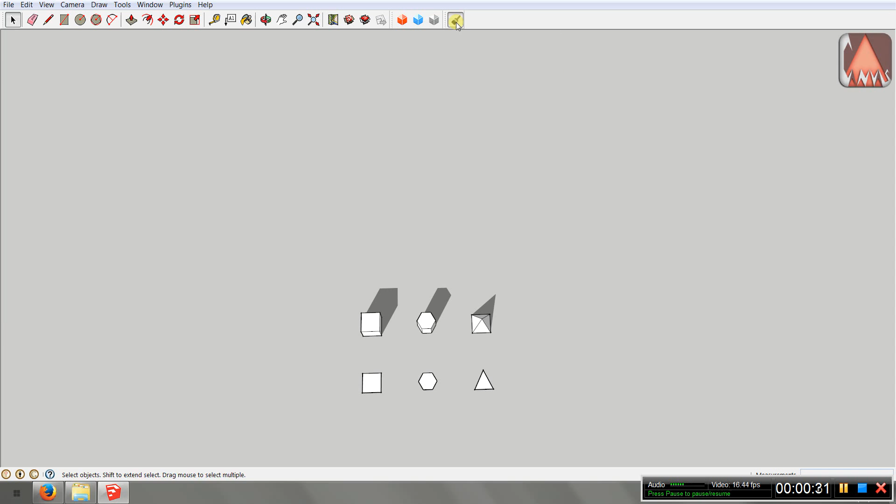When you first install the plugin, you will notice that at the toolbar there's a new button that has a brush as a logo. And if you hover over that, it will give you the title, which is Canvas, and a short description. If we click that button, a web dialog is going to be shown, and here's where you're going to change the parameters that will affect the copy that you're going to place.

So one thing to notice is that if you first activate the tool and you don't have any group or component selected, and you try to click anywhere on your viewport, you will be prompted a warning that says that before the tool can be used, you have to select a group or a component. Okay, so we want to do that before activating the tool. So we click this cube, which is a group. It's important to notice that loose geometry will not work. It has to be a group or a component.

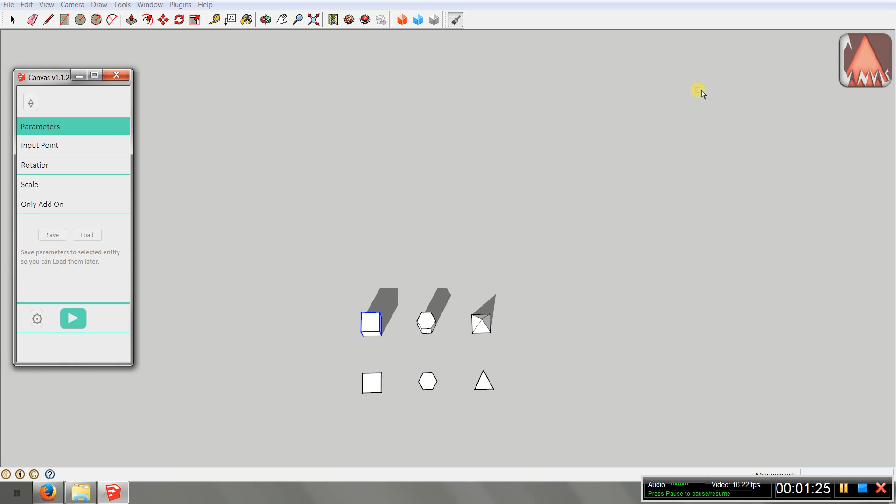Now to activate the tool again, we can do as we mentioned before, clicking that toolbar button, or we can go to the web dialog and click this button near the bottom, and that will activate the tool. Now when we click anywhere on the viewport, a new copy of that selected group is being added. And as default, this is what you will get. But if you want to change the output of the copy that you want to place, you will have to change the parameters. And this is where we're going to explain what each of these parameters can change.

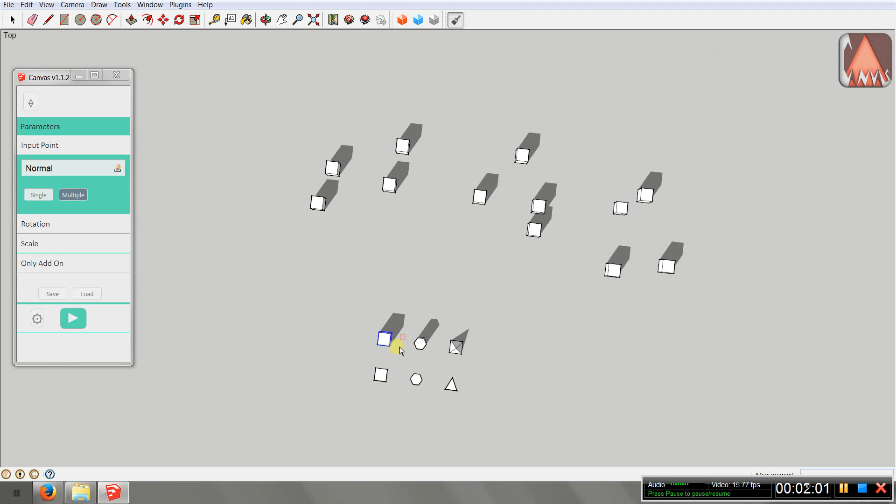The first one is input point. And right now, you're placing a single object per click. If you want to change that to adding multiple objects if you click and hold your left mouse button, you have to change this from single to multiple. And now, if I click and hold the button and move the cursor around, multiple objects are going to be placed. And this is very cool if you want to quickly populate your scene with objects.

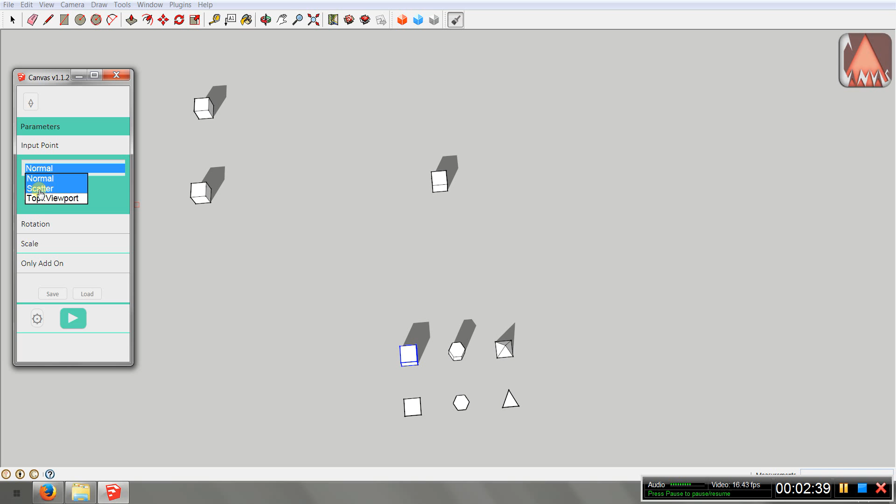Alright, so now we can talk, let me delete this very quickly, about this drop-down menu. The default option is normal, and what this means is that you will place an object where the cursor position is. Okay, so wherever I move the cursor, that's where the object is going to be placed. But let's say I'm going to change that to scatter. What will happen is if I click and hold the button and move, you'll notice that there's a random position generated around the cursor, and this will become more evident if I zoom out.

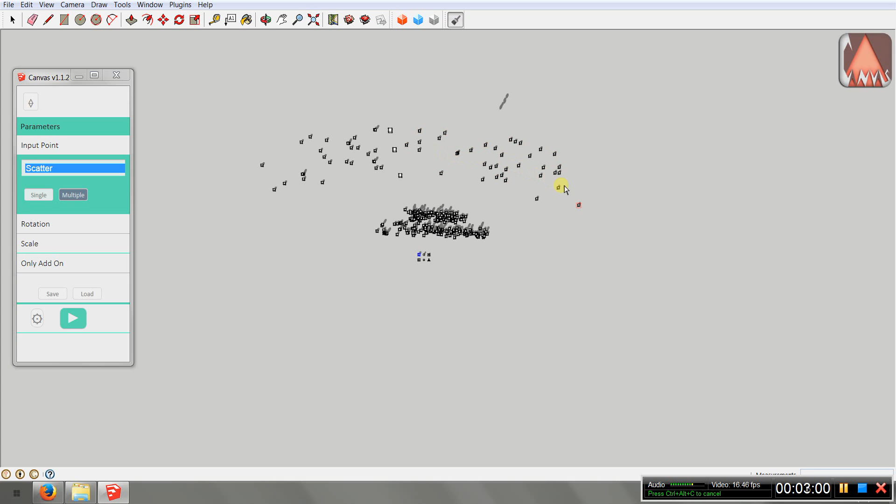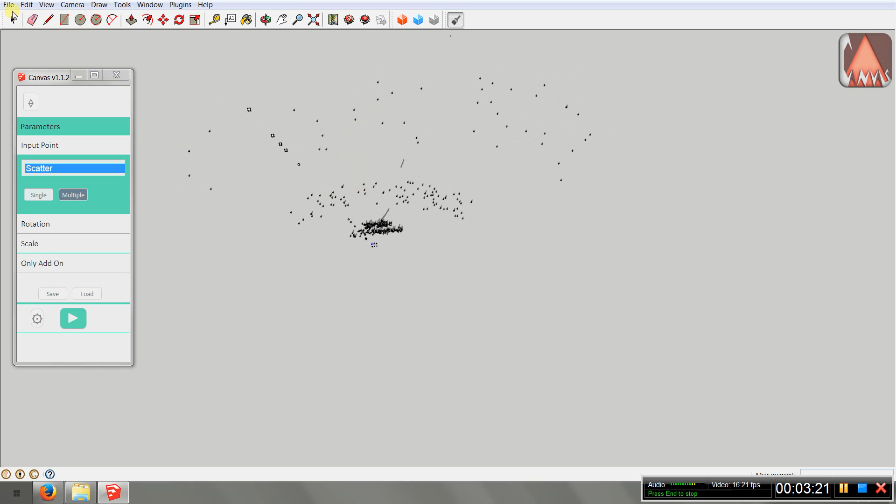The farther away I get and I apply the objects, the further away the objects are going to be laid down. Okay, if I zoom in very quickly, you will notice that the objects that are being laid down are very close to each other. But if I go very far away, let's go even farther away, you'll see they are very far apart. And this is something that you will want to experiment with by yourself, see what works best for you, depending on what you want to do. Let me delete what I just copied so I can keep going.

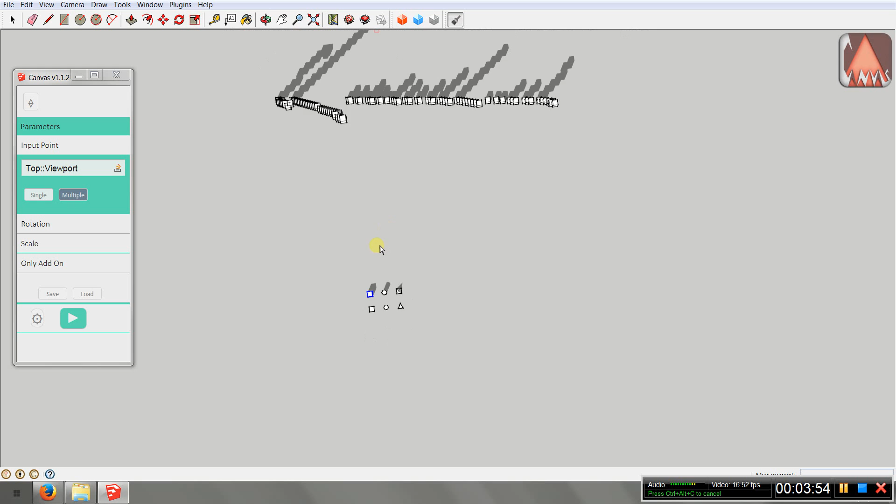Alright. So the next option in the drop-down menu is top viewport. And this is nice if you want to add objects on a straight line. It will not take the cursor position. It will not place the objects around the cursor, but instead it will place the object on top of the viewport. If you see on top over here, there is where the objects are going to be placed. And you can rotate it and use that as reference to place straight lines. Okay? And that is what it is best used for.

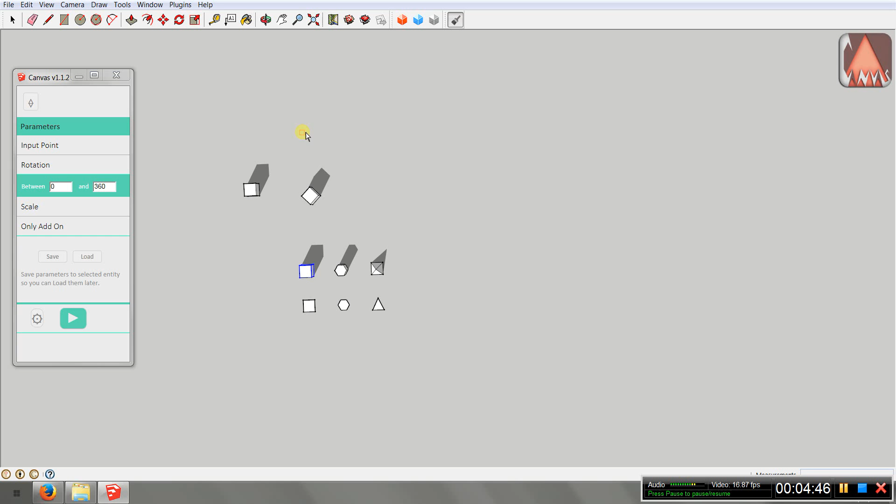Alright, so now that we've explained the input point parameters, let's go to the next one, which is rotation. Before we do that, let's go to the default, and we go to rotation. Right now it's set to 0, so that means when we place an object, it will not affect the rotation. But if we change that to say 45, that new object is going to be placed 45 degrees from the original one. Now an interesting thing is that you can have a range. Let's say we want to rotate from 0 degrees to 360 degrees. And that will randomly generate a rotation from those parameters.

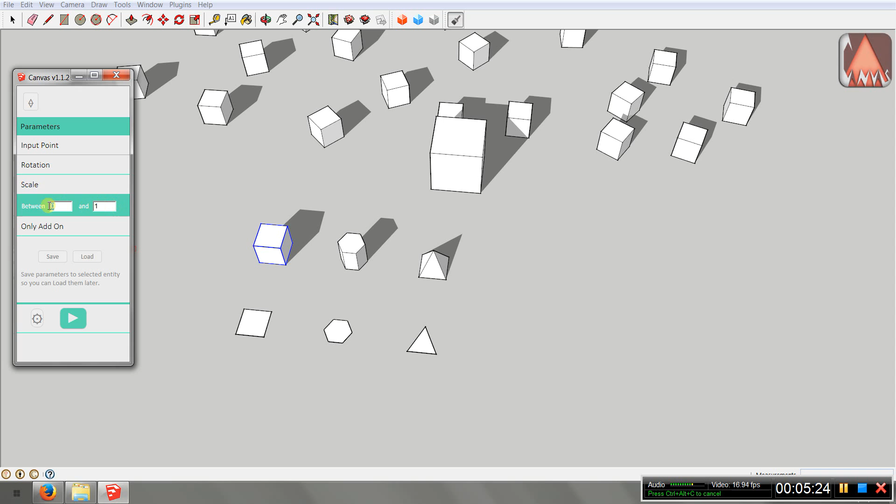Now let's move on to scale, and this is going to place a scale factor of 1. This is the default, so that means that the object that's going to be placed is not going to be scaled. If we want to scale that object by 2 and we place that object, you notice that it's twice as big, and so on. We can set this to whatever number we want. And as we mentioned with rotation, we can place ranges. So if we want to scale from 1 to, let's say, 8, it will randomly choose a factor to scale that object between 1 and 8. Okay, so you get nice variety. Okay, so now let's delete this and move to the next parameters.

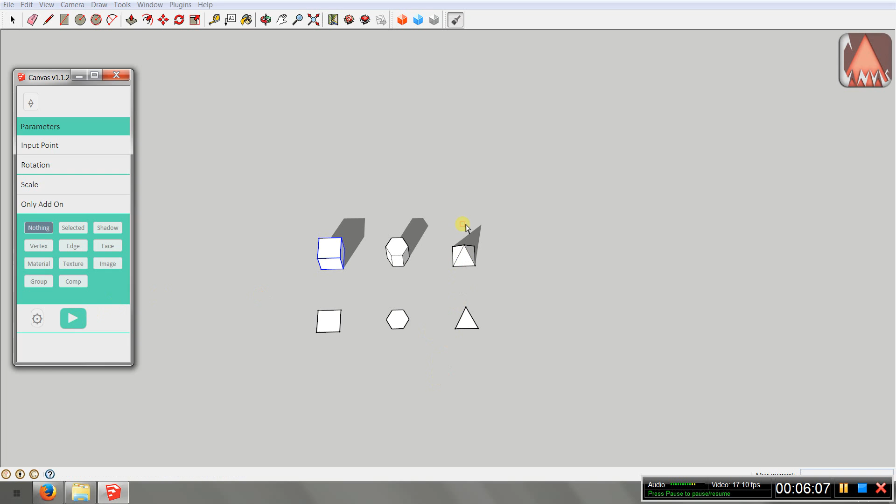The next one is only add-on, and these are basically filters that will add a copy depending on whether those filter parameters are met. The first one is nothing, and this means that the copy you add will only apply if there's an empty space. Right now it's adding an object, but as soon as I try to add a copy on top of a geometry, you will see nothing happens. Only when I move to an empty space is where that object is going to be placed.

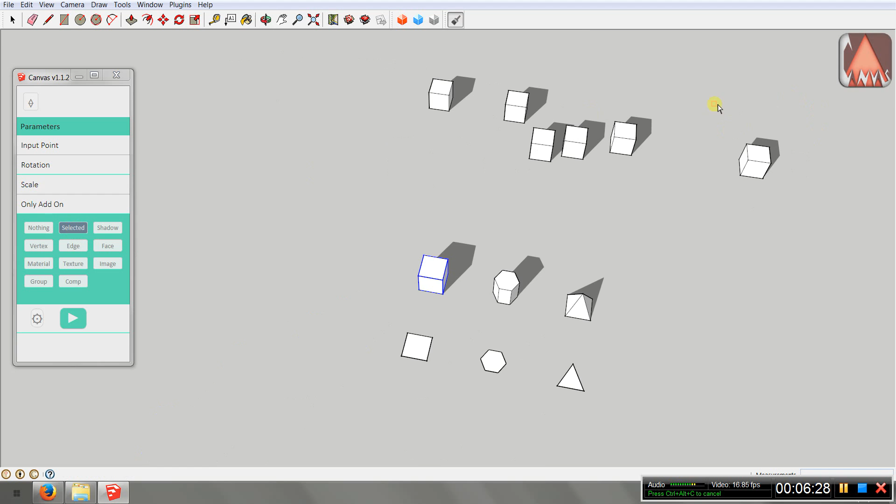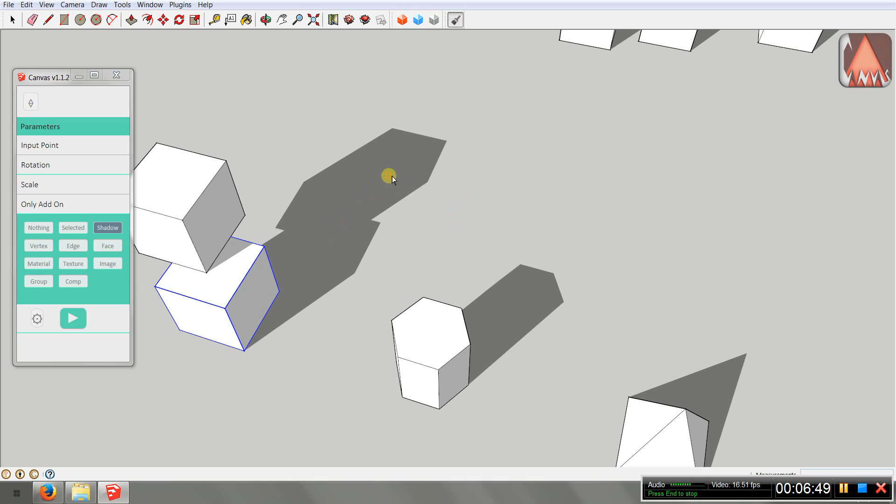The next one is selected, and this means that it will only add a copy wherever there is an active selection. So over here there's an active selection, and I click over here, you see that copy is added. If I try anywhere else, it won't work. And this next one is called shadow, and it will only add the selected copy where there's shadow. So over here there's a shadow, it will select that object. Nowhere else it will work.

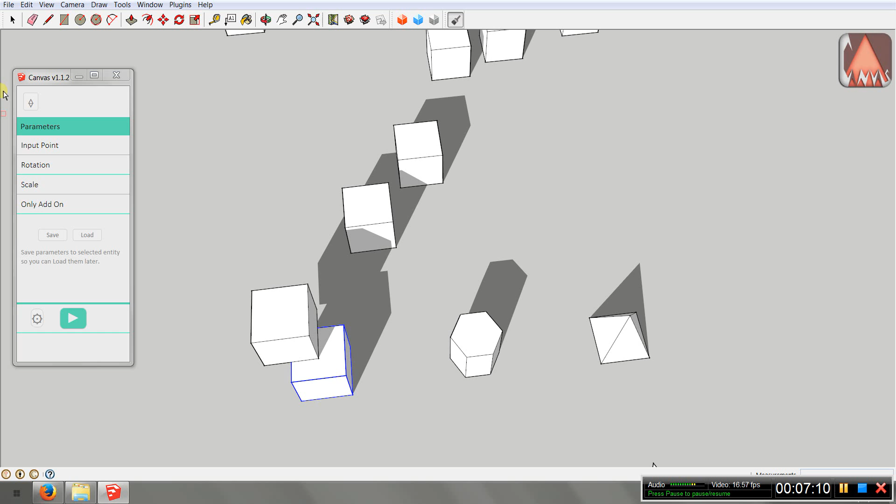And this applies to every filter over here, so I want you to experiment with what each of these does, so that you become familiar with them. So these are the last parameters that you can set. There are other features that I want to explain, and let me delete this so I don't confuse you. This is very cool. You can save the parameters that you set over here to a specific object. Let me demonstrate.

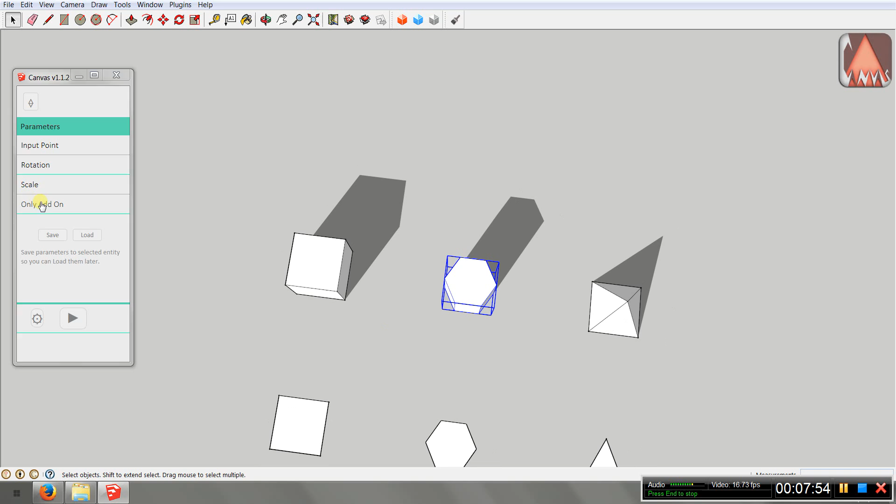If I want to save the current parameters to this object, I select that object and click Save. Now if I select another object and change the parameters, let's say I want the input point to be scatter and multiple, a rotation between 0 and 360, a scale between 1 and 8, and a filter to only apply on nothing, and if I click Save, those parameters are saved on that object.

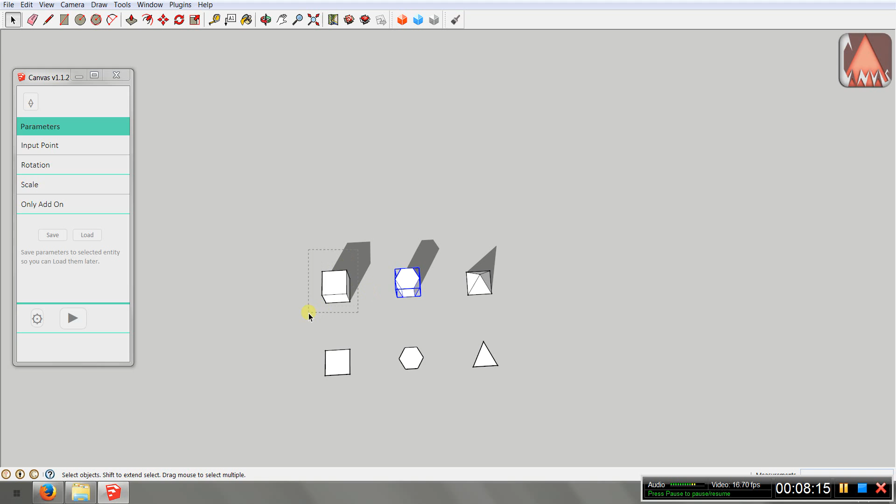Let me demonstrate. If I activate the tool and apply that object, you see those parameters are still active. If I want to change to the parameters set to the first object, the cube, I deactivate the tool first, select that cube, click Load, and then activate the tool again. Once I add the objects again, it will add according to the parameters stored on that object. I hope this was clear. This can improve the speed at which you work with the tool. Alright, so that's it for the parameters.

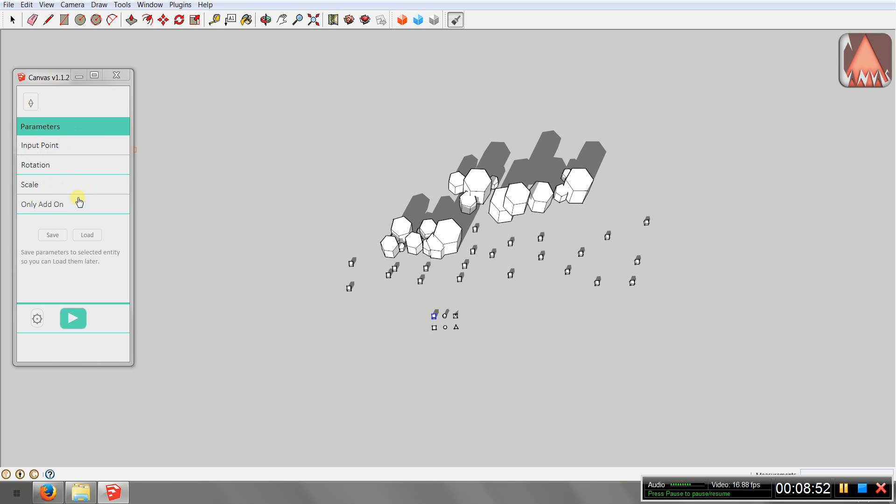Let me just show you a couple bonus things. On top there's a button, and this is useful if you already have the parameters you want to work with and you don't want this web dialog to be that big. You can click this button and it will shrink it so that it gets out of the way when you're working. If you want to go back, you click that again, and that will set the default size for the web dialog.

Now this button over here, beside the play button, if we click that, you will see a couple of options that you can change. For example, if you don't want the cursor to show when you're painting, you can deactivate that. Now when you're painting, objects are being added but the cursor is not shown. I did this because I sometimes screen capture what I'm doing in SketchUp and I don't want the cursor to show.

And this last option: if you already know what these two buttons do and you don't need this description shown below, you can deactivate it by unchecking this button, and now no description is shown. And lastly, if you change the parameters and close the web dialog, next time you open it those options are remembered. Even if you close SketchUp, the next time you open a model, those parameters are saved, and this is very good. So I guess this is it for explaining what the plugin can do.